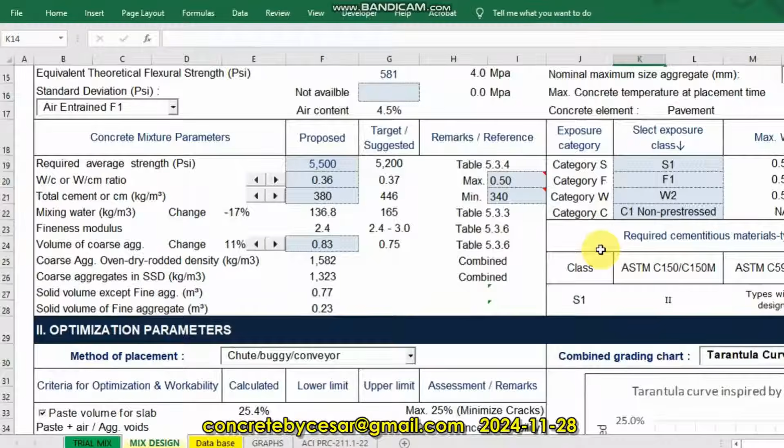Before I begin, let me show you what you have to update before starting the mix design. First, update the specific gravity by checking your third-party or internal test report. Also update the water absorption for the aggregates, as well as the moisture for all aggregates.

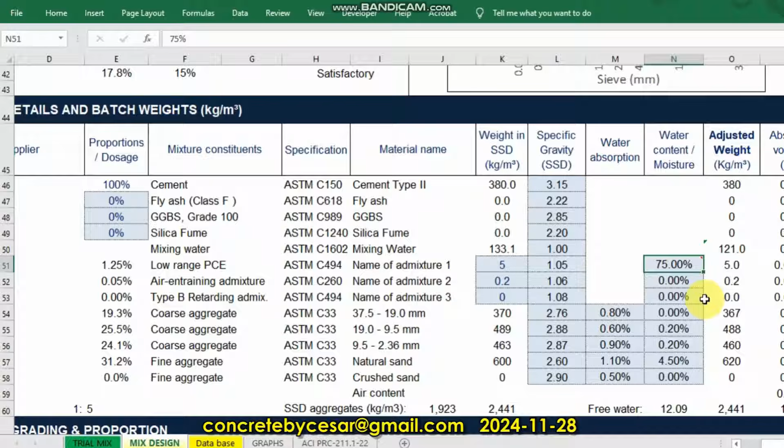This is especially needed when we proceed for lab trial or actual production in the plant. For the admixture, check with your supplier and update the percentage of water content in each admixture where you believe there is water content.

Next, below in section 4, we have to update these cells highlighted in blue, the sieve analysis for coarse aggregate as well as for fine aggregates. Here I prepared 3 sizes for coarse aggregate and 2 sizes for fine aggregates, since typically in the Middle East we've been using a blend of 5 aggregates.

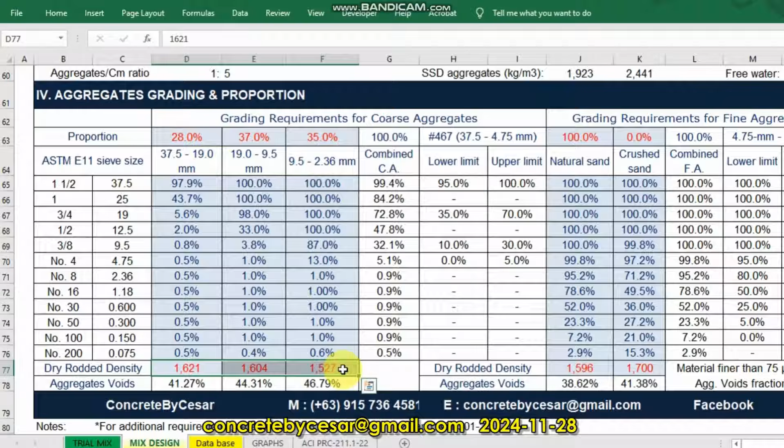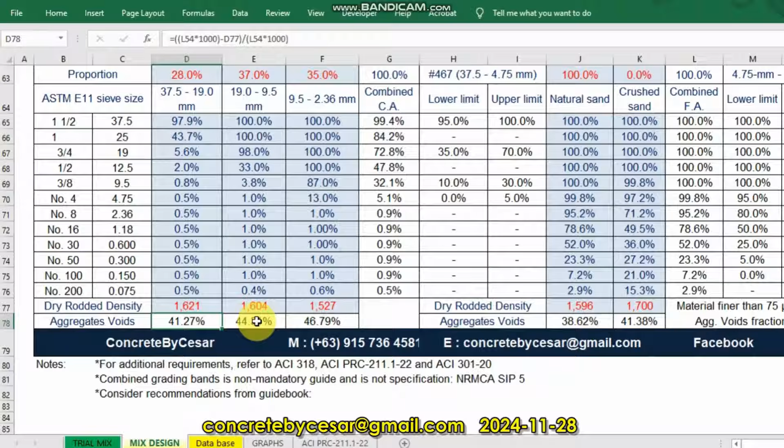Next, we have to update the dry rodded density. In this example, these are the numbers in red fonts below - these are the dry rodded density. Don't bother about the aggregate voids; it will be automatically calculated upon entering the dry rodded density as well as the specific gravity.

So let's go back to the above, starting with section 1, general information and property requirements - that's this area. Starting with the specified strength, let's say we are required to produce a minimum of 4000 psi, which is 27.6 megapascal.

With the equivalent theoretical flexural strength of 581 psi or 4 MPa. If you have an available standard deviation, you can always write it here, let's say 500, for example. Automatically, the required average strength will appear here.

Anyway, let's leave that for a moment and go back to section 1 or the figures above. Let's keep it empty for a while - later we will go back to the required average strength.

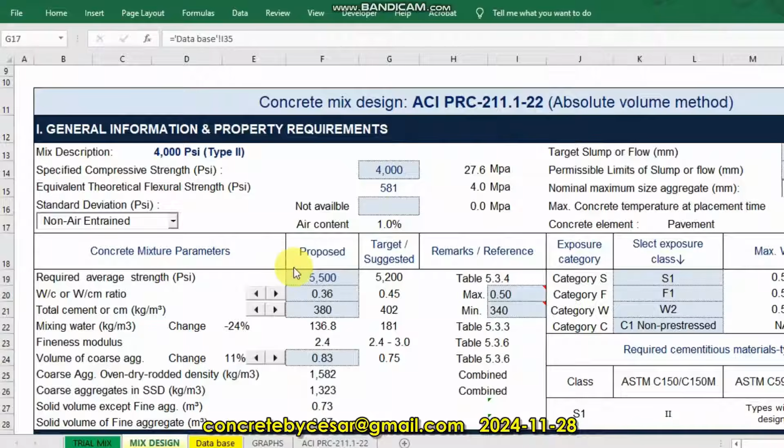Next will be the air content. This is automatically fed depending on the suggested air content. Let's say we are using category F2 and F3, it will be 5.5%, or air-entrained F1, it will be 4.5%. If non-air-entrained, it will be 1% only. In this example, I will use air-entrained category F1, 4.5%.

Next, going to the right side of the template: the target slump size will be 75 mm according to your specification, let's say, which is equivalent to 3 inches. The permissible limits, let's say plus or minus 25 mm, with a nominal maximum aggregate size of...

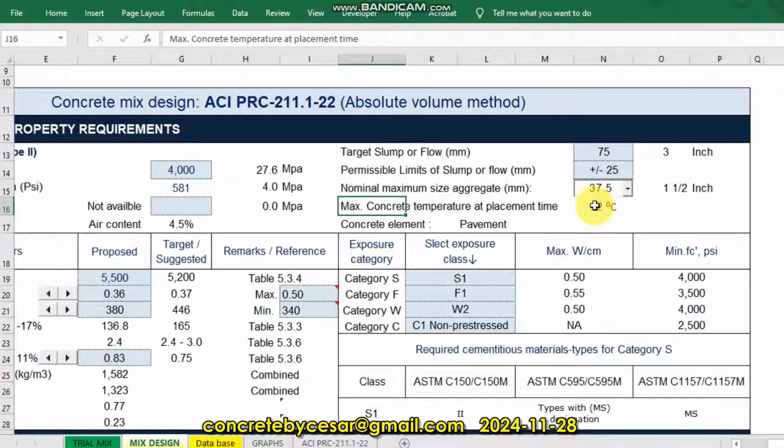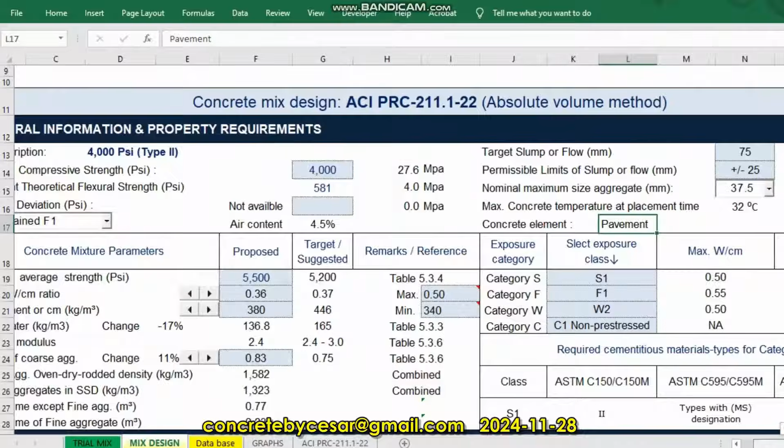You can choose from this dropdown list - let's say 37.5 mm, or 1.5 inch, in this example. Maximum temperature 32, and let's say this is for the pavement concrete element to be poured or cast. Next, we'll go below here.

If you have a specification like in the US regarding the exposure category, this area will be helpful. You just have to select according to your specification. Let's say, for example, category S2 - automatically the suggested water-cement ratio, or recommended maximum water-cement ratio, and the minimum strength will appear.

So let's go back to S1 in this example. Remember, I used F1, that's why I selected F1 also for category F. Water-cement ratio maximum 0.55 with minimum strength of 3,500 psi, and so on for category W and category C.

You just have to select according to specification. Now with respect to S1, we go to this area, the required cementitious material types for category S. Once you select the category S, let's say S2, it will suggest different cement or cementitious types to be used. Let's say S1, going back to our example.

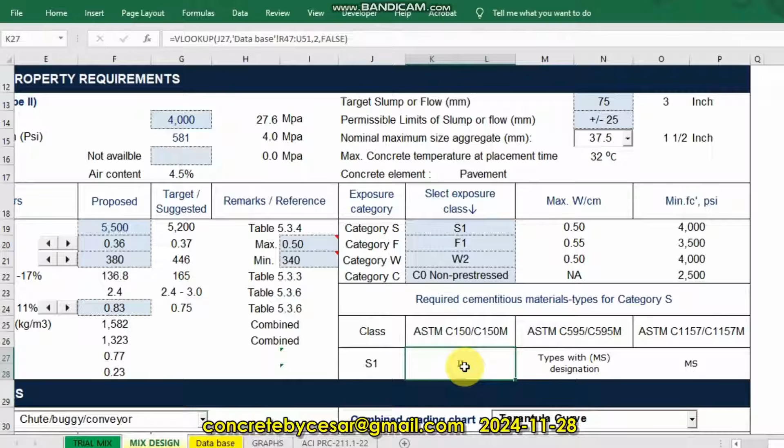In S1, they suggest different choices. I am familiar with ASTM C150, so let's use Type 2 in this example.

Next, very important - normally we have to follow the maximum water-cement ratio as per the project specification, and the minimum cement content. These are the very common requirements whenever you receive an inquiry for concrete.

Now going back to this required average strength, or the target mean strength - as I've told you, this is the target or suggested strength with respect to the specified compressive strength. Simply, they are saying if you need 4,000 psi minimum, you should have a margin to be on the safe side. So from 4,000, we have to target 5,200. We should design to get 5,200 psi at 28 days, so that margin is required to be on the safe side.

So now here I just want to show you the dropdown list. If we choose less than the required value, it will turn red, because we need it to be at least equal to 5,200 or above. So here we have to use the next higher number, which is 5,500 psi.

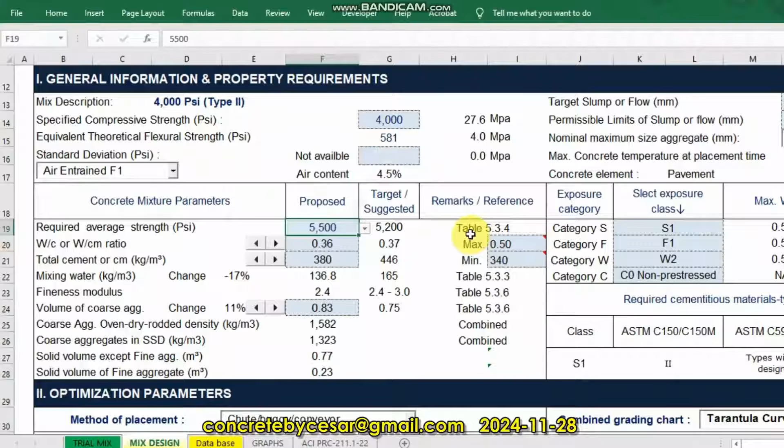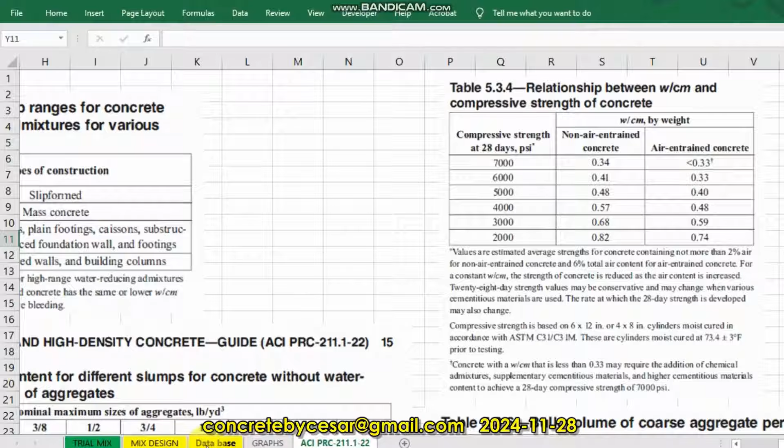So you can always refer to table 5.3.4. This originally came from here, but we have to do some interpolation since there is no 5,500 psi here at the air entrained concrete. So simply we have to do the interpolation, and I put these interpolated values here.

Moving forward, when you choose the proposed average strength, the water cement ratio will automatically appear here as suggested or target value. However, you can still reduce or increase using this button, but don't go beyond the maximum, or it will turn red and alert us. So let us go back to the value 0.36 to be on the safe side.

Next, the cement content. Let's say the minimum requirement is 340. You can always start with 340, and then use this button to gradually increase until you reach a comfortable or optimized amount of cement. Normally when I'm designing, I prefer to use the lowest possible water where we are comfortable to work with, especially since we need to replace a huge amount of ice during summer or whenever our moisture is higher.

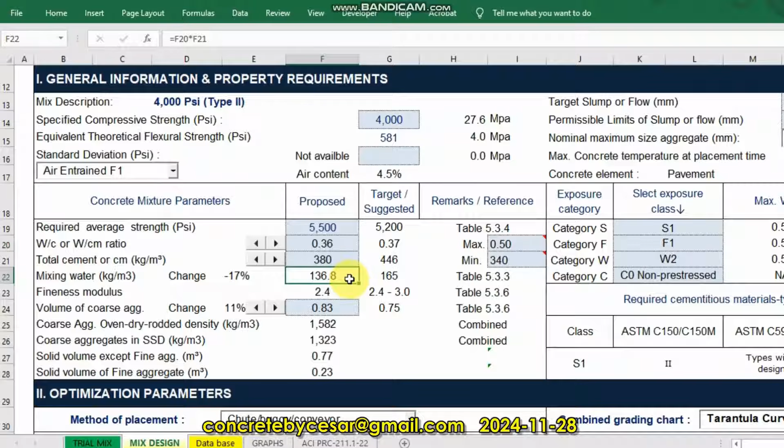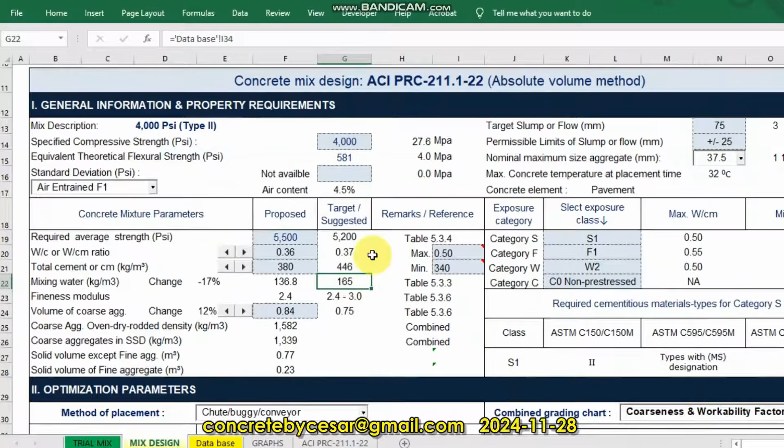Before moving forward, I want to point out that the formula from our guidebook for cement content is mixing water, where you have to refer to table 5.3.3, mixing water in kilogram per cubic meter, divided by water cement ratio, which will equate to 446 cement content. I want to explain that I'm still respecting the guidebook, so I mention this target or suggested value based on it. However, this will be our proposed value since we are designing the concrete in a much more practical way, especially when you are in the ready-mix concrete field of industry.

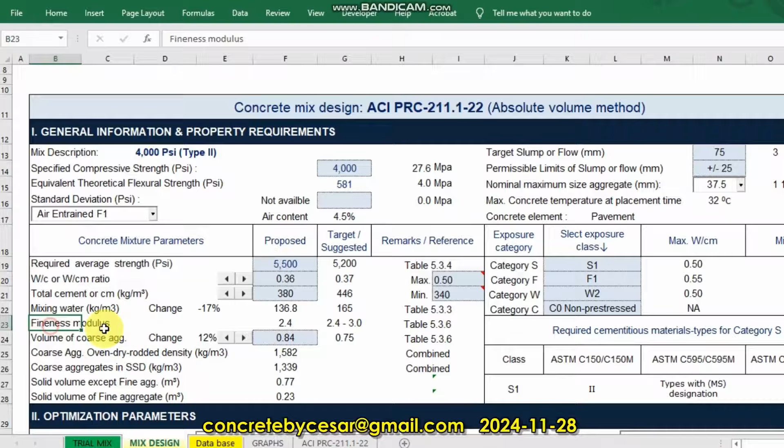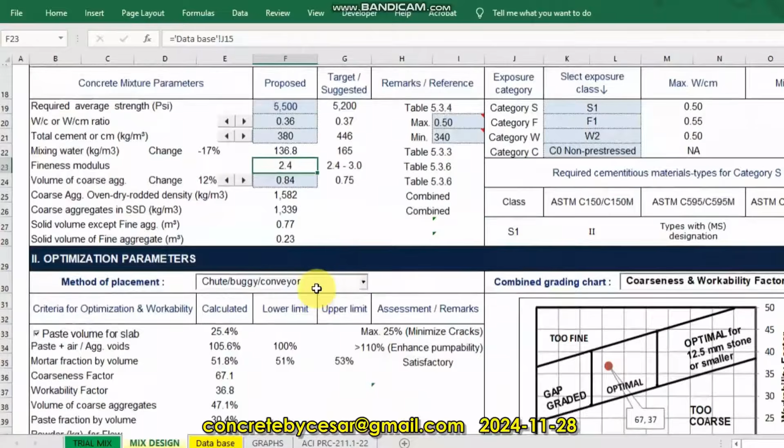Moving forward, next will be our fineness modulus. That will automatically appear here upon entering all the values for the sieve analysis of our fine aggregates, so you don't have to worry about that. Now we are at the minimum value of fineness modulus, between 2.4 to 3, we get 2.4.

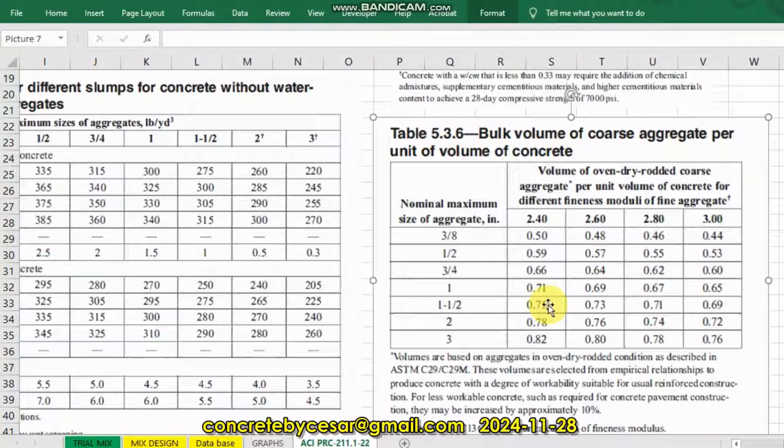Next, the volume of coarse aggregate. Referring to the table again, that will be 0.75 using the nominal maximum size of aggregate 37.5 with a fineness modulus of 2.4. You can double check it from this table: 1.5 inch is equal to volume of coarse aggregate 0.75 at 2.4 fineness modulus. I just want to show you where it came from.

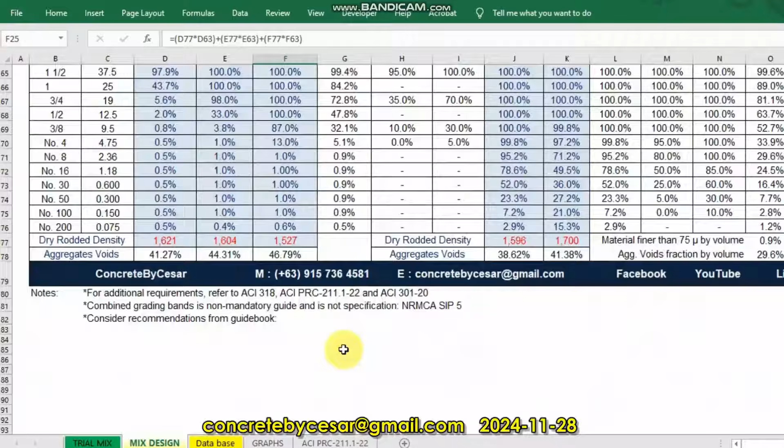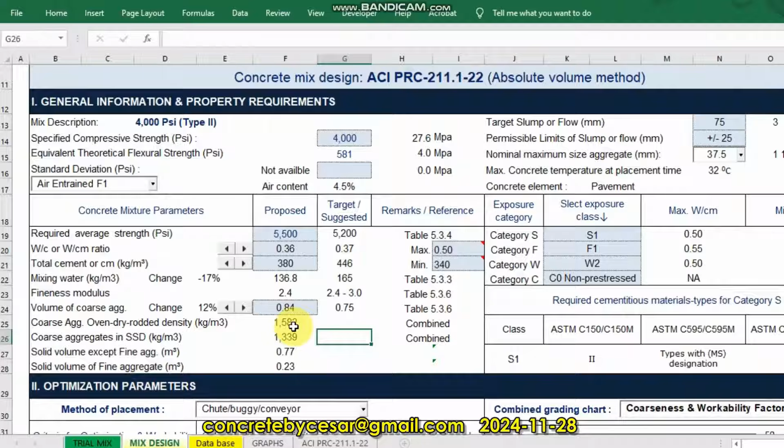For the coarse aggregate oven dry rodded density, as I mentioned, once you update the dry rodded density, it will automatically be combined here. That will be the result of combining these three aggregate sizes. Our oven dry rodded density will be 1582 kg per cubic meter.

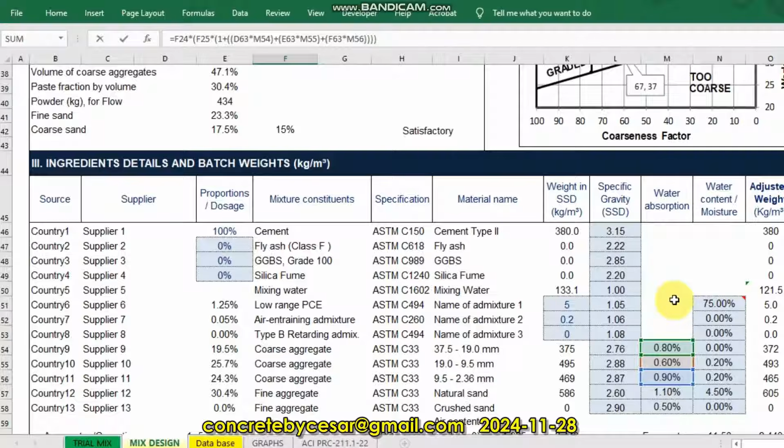According to our guidebook, we have to convert into SSD condition. You can check the formula if you want, but it's a very lengthy formula. In short, since we have our water absorption, we can easily convert this into SSD. So from dry 1582, the oven dry rodded density, our coarse aggregate in SSD is 0.84 of 1582, which equals 1339 in SSD condition, coarse aggregate.

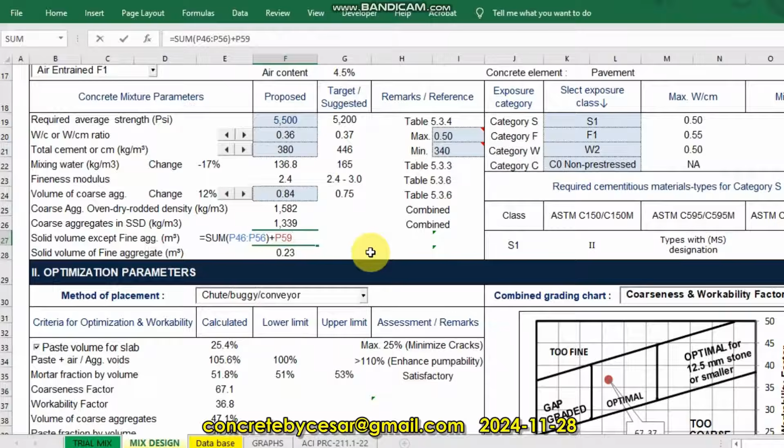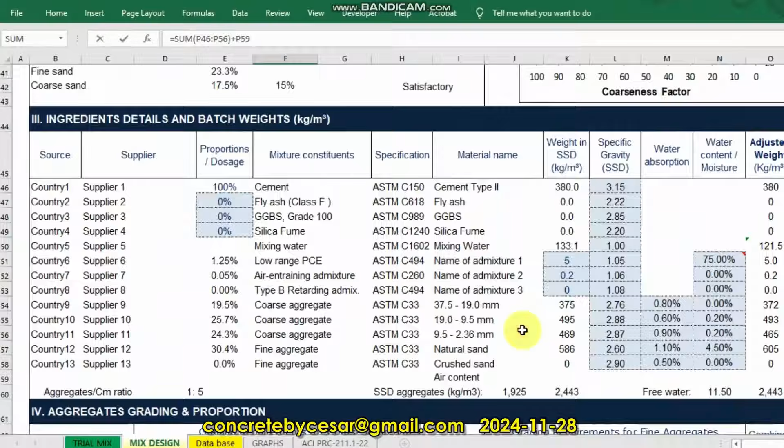Next, the solid volume of all materials except the fine aggregates. It's 0.77 cubic meter. This is simply the summation of all this value, including our air voids. So the remaining solid volume of fine aggregate will be 0.23.

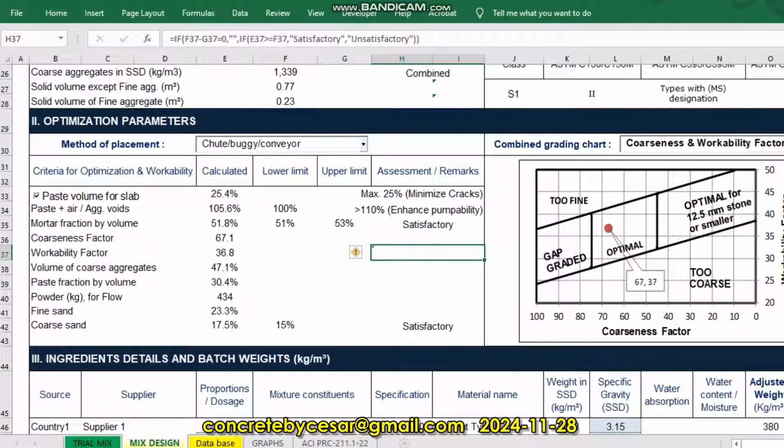Next, finally, our section 2, optimization parameters. You'll notice that in this latest template, I put them side by side: this method of placement, the combined grading chart, and our controls here, so that you can easily see and look around. While you're adjusting the buttons, you will find that it is affecting these parameters and our gradation chart.

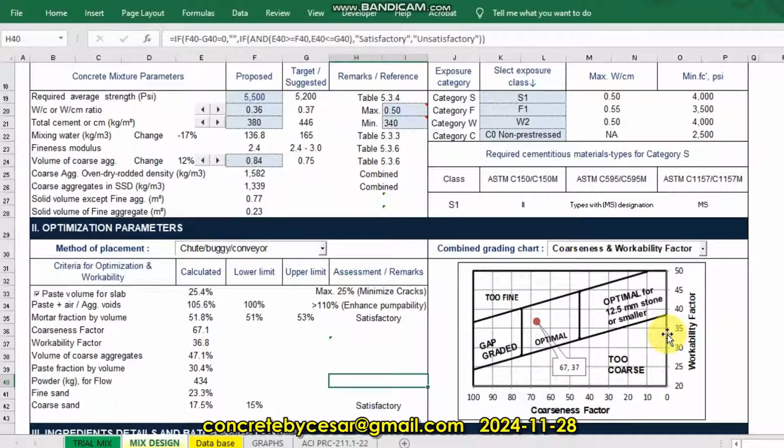For example, our paste volume for slab, since this is pavement, we consider it as slab. It says maximum 25% of paste volume, so that we can minimize the cracks. Our value is 25.4, which we can say is acceptable. Once you reduce the cement content, you will see that we are on the safe side with 24.7. So that is very easy to analyze when we are using this button.

Going back to 380, as well as for covering the aggregate voids by the total paste, including the air, it's 105% in this example. If you choose another method of placement, for example the 100 mm pump, it will not be suitable - it makes sense because we are designing pavement with lower slump. So if you choose the pump, it will be unsatisfactory. If you choose SCC, there will be a lot of unsatisfactory results.

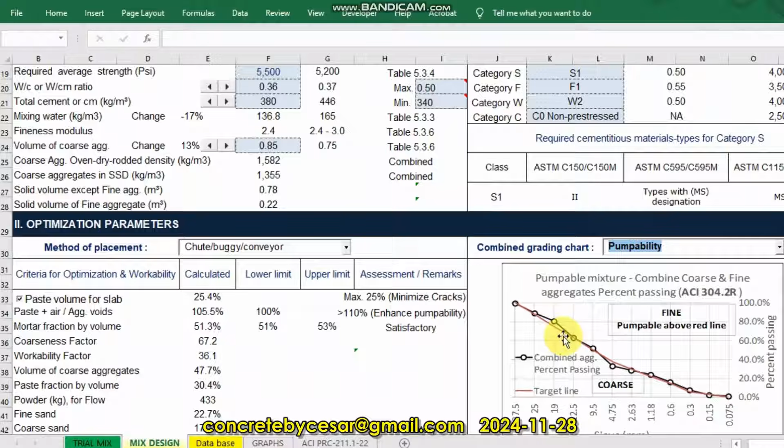So let's try another chart. Let's say tarantula curve. It's within the limit. If you use the 0.45 power chart, it's almost very near to this target line, which is good. If we choose, for example, pumpability, even it's almost near to this red line. So we have to be on the upper line to be much more pumpable.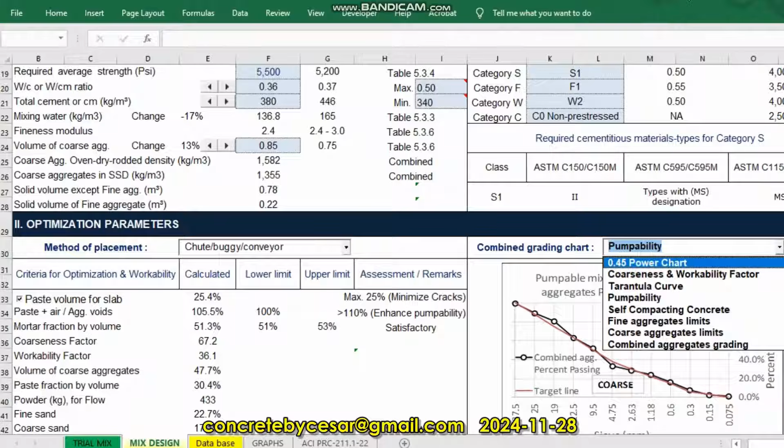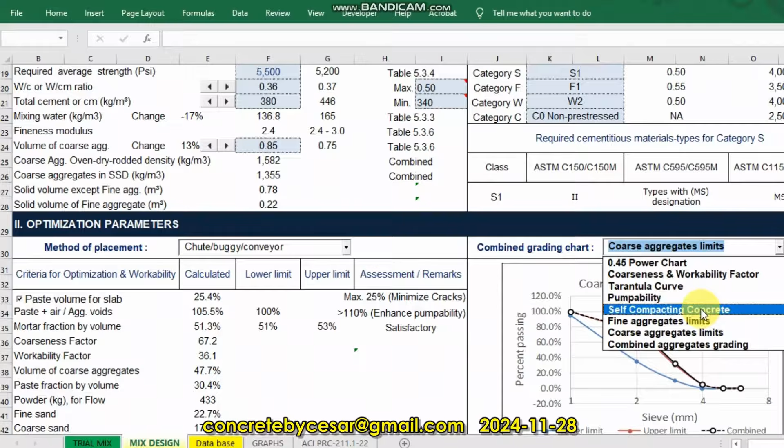We can check also the fine aggregates here. It's in the limit. The coarse aggregate is in the limit. And of course, since we're not using SCC, that will be outside the limit.

So let's go back to our coarseness and workability factor. So this is why it's very easy to decide or to design and to optimize our concrete mix design using this template.

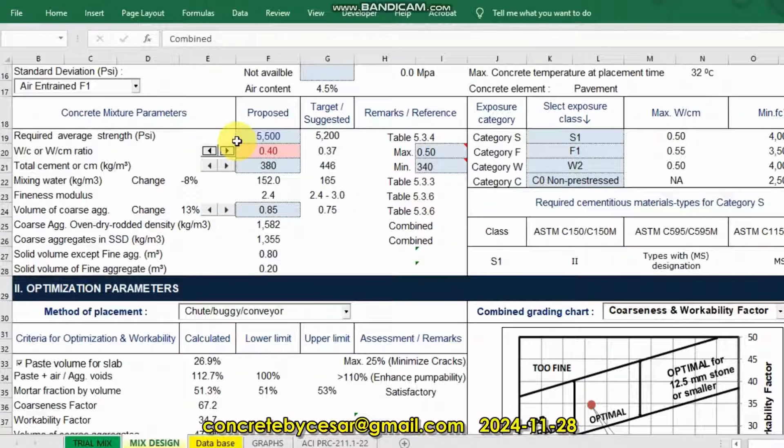So let us try also the water cement ratio. If we increase that one, of course it's beyond, but I just want to show you that it will also affect all the values below the optimization parameters.

0.36. If we go very low, so you can see the paste volume is getting less also, and so the aggregate voids now it becomes 91% only. Meaning covering this is not enough, so we really need to increase our paste. Let's go back to 0.36.

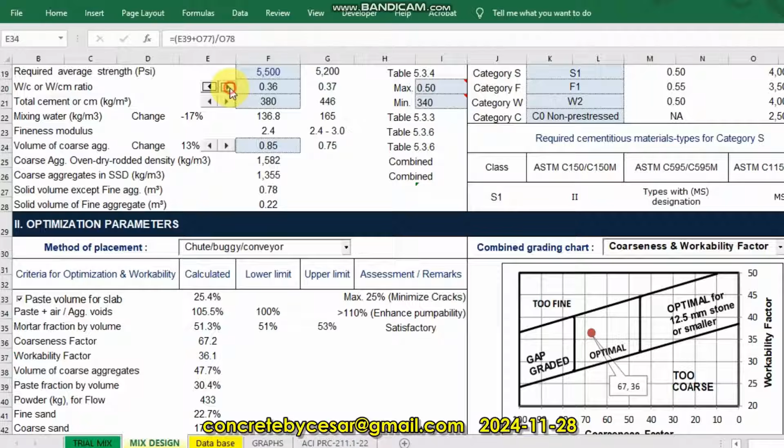So finally, let's go to section 3, ingredients, details, and batch weights. So this is self-explanatory. You can edit this description of source and supplier. The highlighted cells, of course, can be edited.

For example, you are required to use cementitious material like fly ash, then you can just simply write here, for example, 20%, so automatically it will appear here. It will appear here as 76 kg, which is 20% fly ash. Let's put like one more, 5% silica fume. It will appear here as well.

So in case you are required, then you can use this portion to supply the percentage of your cementitious materials.

For the admixture, in my experience I have used low range PCE, or in between low range and mid range PCE. So I estimated to use like 5 kg per cubic meter. I also need air entraining admixture, 0.2 kg. Since we have here 4.5% air content, to achieve that you need air entraining admixture. It could be more, maybe 0.3, 0.4, depending on the trial mix result.

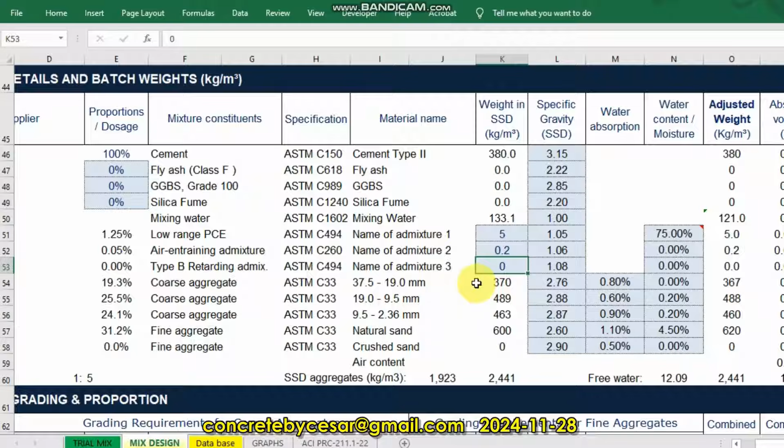So I need to explain a little bit more. Here the absolute volume is 1 cubic meter. Very self-explanatory. The weights of material in SSD aggregates is 2441. It has to be equal to the adjusted weights, 2441 as well.

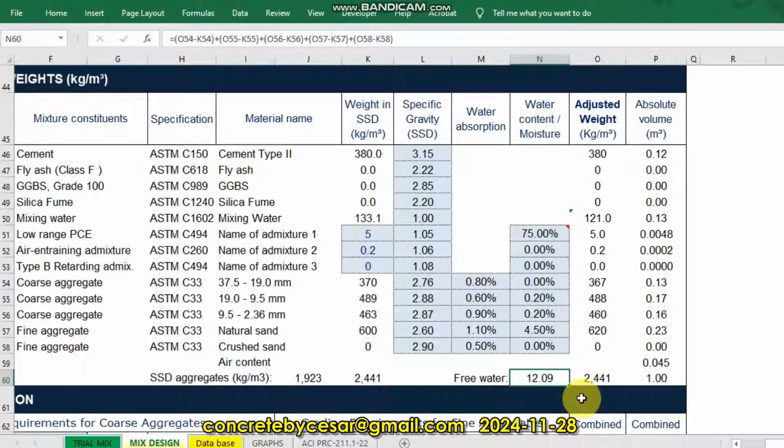The free water is 12 kg, so you have to deduct it due to the moisture as well as the water content of the admixture. Our aggregate cement ratio is 1:5, so it's very normal.

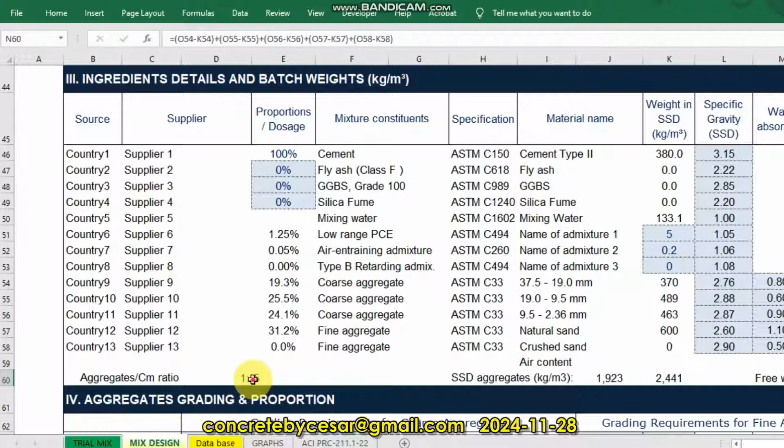So basically this is our final design value in SSD condition, and this is the adjusted weights based on the actual condition of your aggregates.

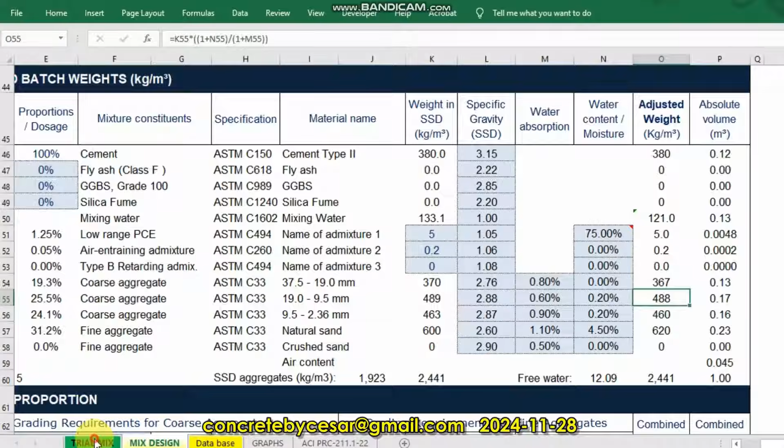So I have here also a trial mix form where you can do the lab trial, perhaps in 50 liters or 0.05 cubic meter. So this will be the value when you are trying to do a small trial batch in your lab.

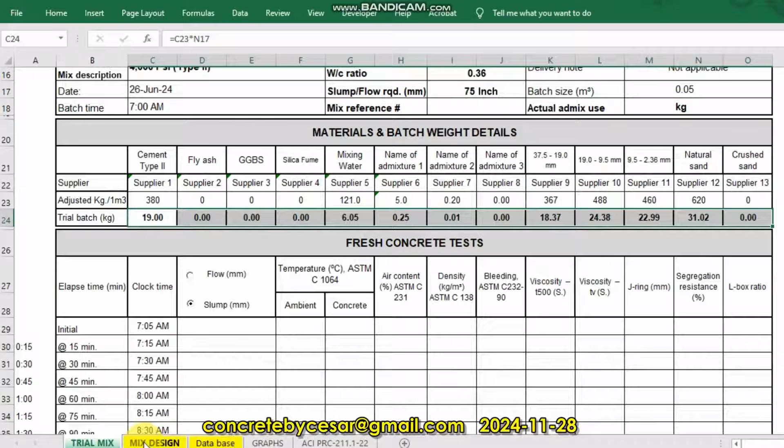Next, I just want to show you again this aggregate grading proportion. So I predetermined before that this is the proportion of each aggregate size, like the 37.5 mm at 28%, the 19 mm at 37%,

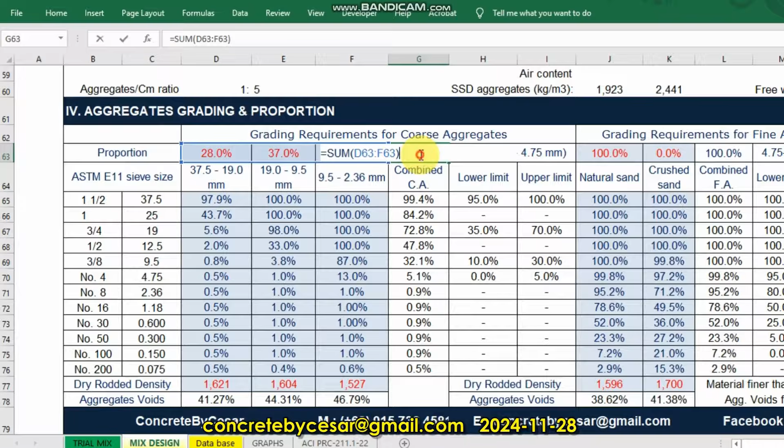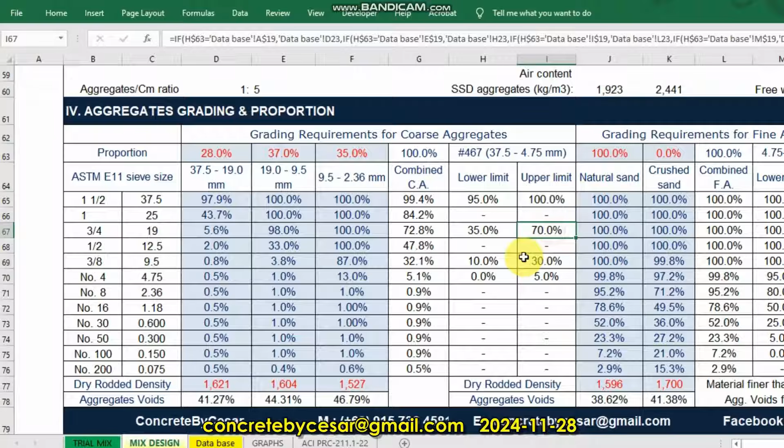the 9.5 mm at 35%, which is 100% in total. You can see also that this is the lower limit and upper limit, and you notice that we are exceeding the limit. The 70% we exceeded, it's 72.8%. Instead of 30, it became 32.

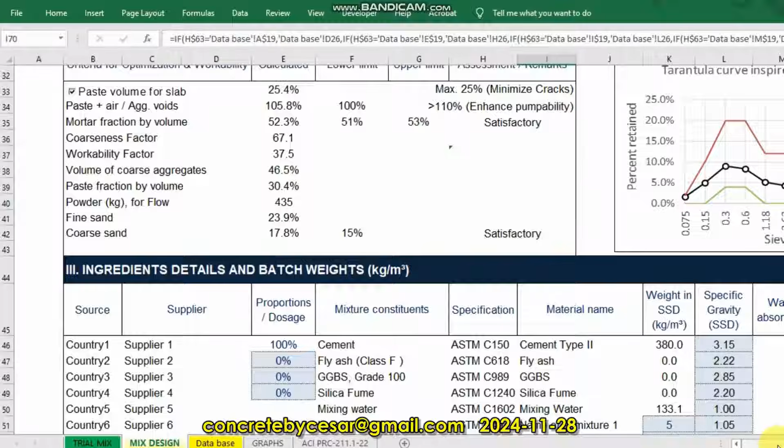So I just want to point out that in other cases, like for example in my case, the most important thing for the specification is to be in line with this chart.

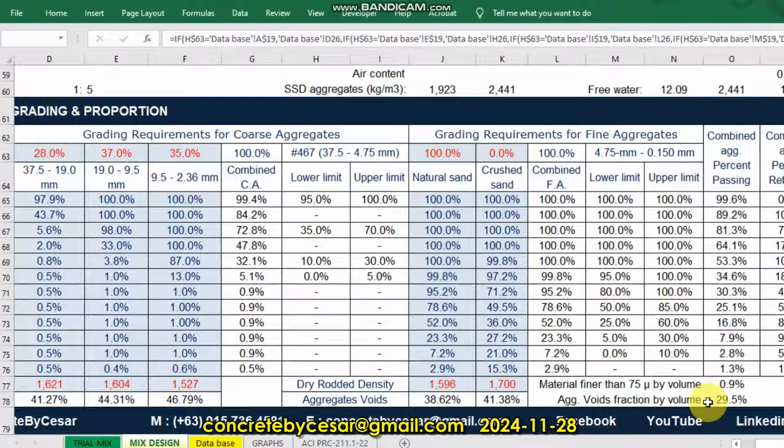Okay, so you don't have to worry in case the specification really calls for you to be in line with this lower limit and upper limit according to ASTM C33. Then you have to start from here, and you have to manipulate these values or this proportion.

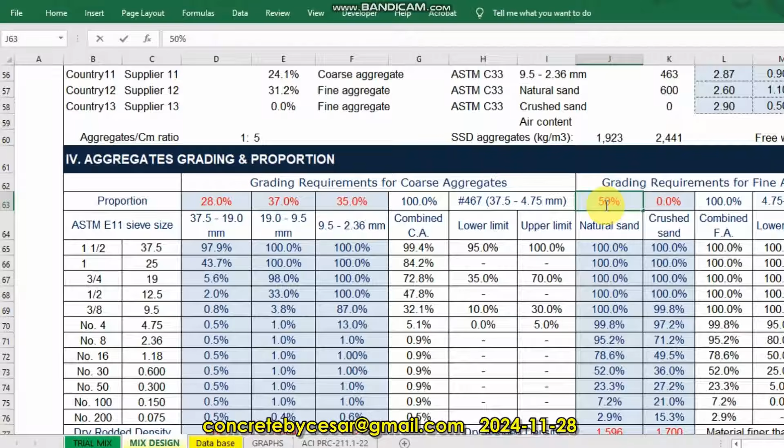If you have two sizes of sand, one natural, one crushed, you can also write here, for example, 50% here, another 50%. Then you will check the lower limit and upper limit if it's inside the limit. So one by one you have to check in case you need.